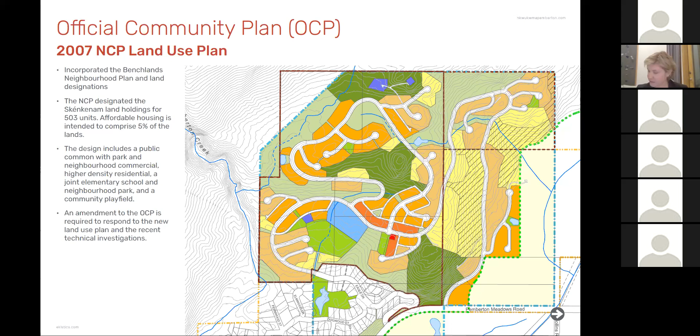And the zoning, likewise, this is the zoning right now. It is R-1. We would, if it was consistent with the neighborhood concept plan, could proceed. But again, we want to make sure that it isn't just a single family subdivision, that it meets the needs of the greater community with a range of housing types and densities.

I think it's also really important to know that if you're looking for community amenities through new development, what triggers that is rezoning. So this also allows the rezoning to be in place so that the developer can contribute to the community amenities.

I would note that the CD zoning that's proposed will have flexible commercial community use spaces, as well as allow some flexibility over time in the land uses. So it's a much better tool than the really restrictive R-1 zoning.

I will now hand off to Paul Fensky of Ekistics, who will present the development plan. Thank you.

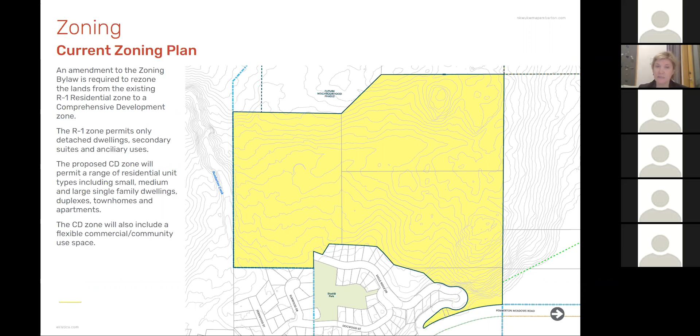Thanks very much, Carolyn, Maxine, Carrie, for the presentation to date. We're very pleased to be here with you tonight. My name is Paul Fensky. I'm a principal with Ekistics, and we led the planning and design with the Village of Pemberton for the NCP back in 2005, 2007. So we're very pleased to be with you this evening, participating in the updating of the plan and the advancing of the Nkwúkwma neighborhood.

The last time we had a chance to be together was at the very beginning of the pandemic, March 11th, 2020. That was the evening we held an open house in the community center, where we presented our understandings of the land, as well as some fly-through videos to help translate that 2D understanding into a 3-dimensional understanding based on the latest 1 meter LiDAR contours and the various constraints we understood at that time.

In the intervening year and a half, there's been a world pandemic, but more specifically in terms of the Nkwúkwma neighborhood, there have been continued technical reviews, both planning and engineering reviews undertaken on site, as well as initial conversations with both the Village of Pemberton and the provincial government.

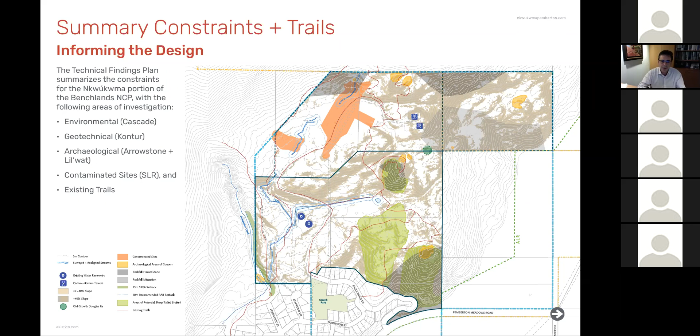The lands rise well above the valley floor and feature a variety of solar orientations and big valley views. In understanding where trails move in relation to the steep slopes, the riparian systems that move through and help drain the site, as well as the areas of contamination, ecological and cultural interest, this plan provides an opportunity for us to have a solid foundation of information as we started to explore how the Nkwúkwma neighborhood could fit within these lands and form a part of the larger, more complete Pemberton community.

Working with all of the opportunities and constraints identified within this 77 acres of the Nkwúkwma neighborhood lands, the lands have been categorized now into their level of constraint. The most constrained lands, coded green, represent steep slopes, areas of riparian and waterways, and areas with high environmental sensitivity, covering approximately 35 acres, or 45%, of the Nkwúkwma neighborhood lands.

Medium constrained lands represent moderate slopes, low as well as medium ESAs. Geotechnical and archaeological areas have been identified, as well as those lands that are difficult for accessing with streets or municipal services, and they cover approximately 10% of the site, or 7.5 acres.

The remaining lands are coded in a light cream color, noted in the legend as potential development areas, and they have low constraints. They're generally gentle to moderate slopes, with no or low ESAs, and include areas like utility corridors. They also provide lands that are contiguous, larger areas where we can have street access and run municipal services. Interestingly, they also represent about 35 acres, or 45%, of the site.

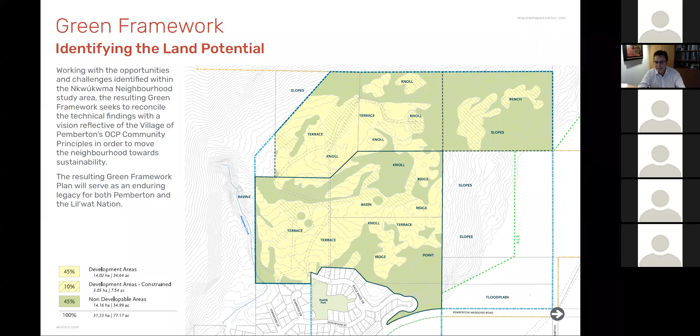As we transition from that 2D plan with all of its somewhat abstract forms and lay that onto the three-dimensional model of the site, we can better understand where those areas of development potential are, as well as where those areas of non-development potential are.

Moving up from Eagle Ridge Drive, that area where the two water reservoirs are located, shown as white dots on the plan, sits in the middle of what is the largest potential development area with the lowest constraints. Likewise, sitting above a band of green forest represented by the steep slopes is where the historic gun range and rifle club was, noted as a terrace, again with gentle lands that sit way up top.

In contrast, we can see the green lands, especially the point that rises above Pemberton Meadows Road at the entrance to Eagle Ridge Drive, is part of that incredibly steep slope area, with not only archaeological interests and habitat values, but also geotechnical constraints. The green framework then begins to direct the planning, as mentioned, and starts conserving what matters in the Nkwúkwma neighborhood.

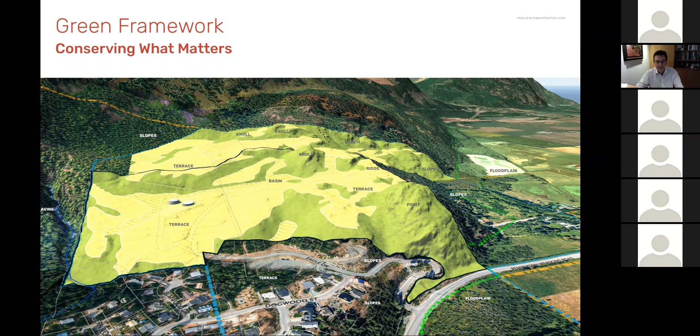As we turn our attention from the larger Benchlands OCP lands and their constraints, and begin to focus down on the Nkwúkwma development application that was submitted and is currently with the Village of Pemberton, we wanted to make sure that we were satisfying all of the requirements as listed by the village.

That involved having Cascade Environmental Resource Group do the initial environmental review and riparian assessment, and that work served to confirm our understanding of the site and also confirmed the suitability of the neighborhood plan.

Before work goes ahead on the site, there are still some required surveys that will be done, including rare and endangered plants, and wildlife, to confirm the presence, such as the little brown myotis roosting sites, a type of local brown bat, as well as the potential for sharp-tailed snake, specifically denning sites. There'll be a screech owl nest survey done, as well as songbird nesting windows, which will limit the time of potential clearing of the land at the time of development permitting.

There'll be a series of vegetation requirements that Cascade identified, really stressing the retention of vegetation currently on the site to facilitate wildlife movement, retain existing breeding and foraging areas, and specifically look for opportunities to avoid impacts on the local bear population. New landscaping, whether street trees or private yards, will require native tree and shrub species that don't attract bears but promote pollinators, birds, bees, and butterflies as part of a larger habitat enhancement strategy.

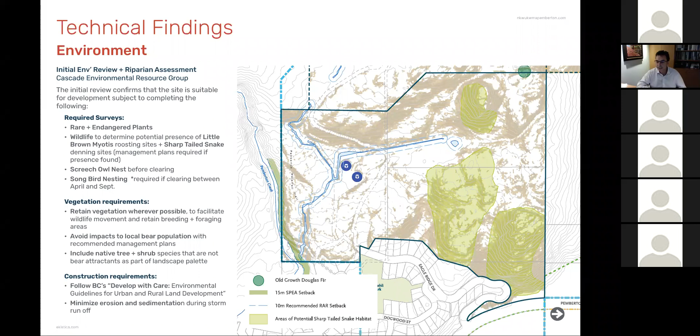In addition to the environmental work done by Cascade, Kontur geotechnical consultants also provided a geotechnical assessment that characterized those observed naturally occurring areas of hazard, noted on the plan in the darkest gray areas, and areas that we needed to stay away from in terms of guiding future development and potential neighborhood uses, as well as identifying areas where mitigation could occur to lessen those hazards.

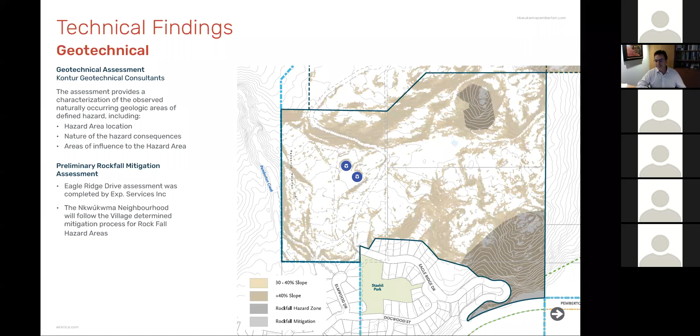With that series of technical studies done, not only for the Benchlands but also more specifically for the Nkwúkwma neighborhood, that 77 acres of the lower portion of the Benchlands sitting adjacent and slightly above phase 1 of the Benchlands, as an extension of Eagle Ridge Drive, we then come to the neighborhood concept.

This is a draft concept, but it's a concept that we've been able to engage those constraints, as noted, as well as engage that community feedback that Carolyn was able to walk us through the highlights of, and in doing so, come up with an approach very much centered in supporting the community.

Specifically, looking at opportunities to work with the land, and in working with the land, ensure that we're minimizing intrusion and land regrading, that we apply hillside design strategies where we're stepping building foundations with walkout basements, minimizing retaining walls, and applying hillside street standards, which allow us to have a narrower platform while still providing for the safe movement of people, bicycles, and cars in a shared platform.

We're also celebrating the views, and that also means ensuring the privacy of our neighbors, those who live within Benchlands phase 1. The plan also is centered on delivering a diversity of homes, and that's part of the need for the OCP update and the rezoning, to ensure that we can do more than simply large RS1 single-family homes.

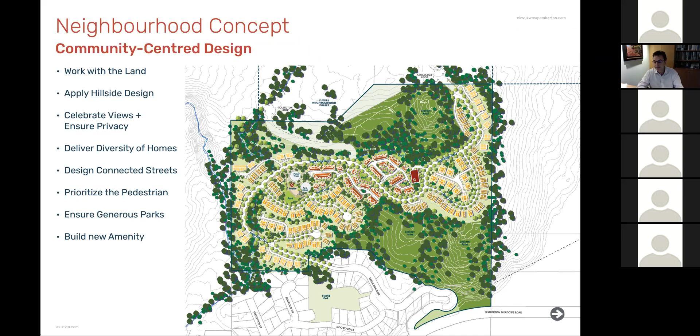As we zoom in to that area, the 77 acres subject of the Nkwúkwma neighborhood development application, we see the extension of Eagle Ridge Drive as it circulates first to the south and then to the west as it climbs up the hill, moving in behind the current water reservoirs.

It arrives at a central terraced platform before then moving further up and around the central rocky knoll towards phase 3, or those future development lands currently under remediation for their contamination.

Within this plan, you see different colors of buildings, which represent different sizes of both single family detached, as well as duplex, townhomes, and a single apartment building located in the center of the plan.

The plan is structured to provide a pedestrian orientation with sidewalks on local streets, as well as the extension of Eagle Ridge Drive, and the provision of both public neighborhood parks, as noted with the label park, both a lower park and an upper park, with opportunities for grass gathering areas, whether for toboggan hills and parties, but also playgrounds, covered pavilions, and even adventure play from pump tracks to rock climbing opportunities.

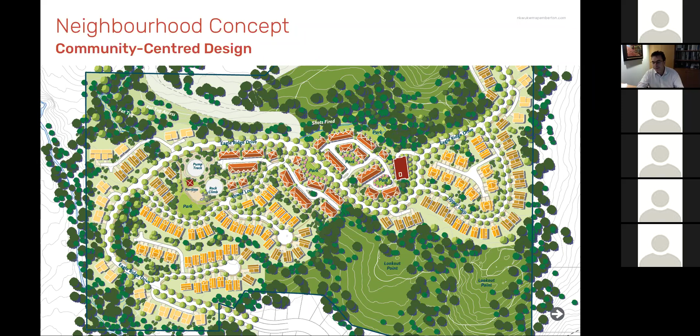As mentioned already, the idea of the housing mix presented is to recognize the community need for both attainable, family-friendly housing, as well as downsizing and aging-in-place opportunities. In total, the plan provides 85% of all future homes as ground-oriented homes, either as townhomes, duplexes, and small single family, as well as some medium and large homes, with a total of 267 homes within this portion of the Nkwúkwma neighborhood. The character of the homes designed and being pursued is one that celebrates Pemberton's character as a mountain community.

As well as one of small town charm in terms of its materials, which will be regulated through site-specific design guidelines registered on the property itself. Part of the need for rezoning is the shifting down of the size of homes and associated lots. We realize that to have a community neighborhood with all these features and amenities, we can live in a way that allows not only large homes but also small single family, duplex, townhome, and even apartment, all within the same neighborhood—really an opportunity to provide a home for everyone.

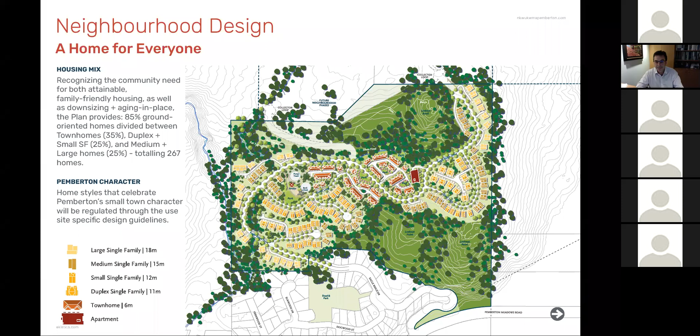In addition to homes and new amenities, there's an opportunity to design the street network as a place of public realm that's really intended to be a shared space. You can see the different colors of roads, with the extension of Eagle Ridge Drive in the darkest orange as a designated collector loop, moving up and around through the different terraces of the Nkwúkwma neighborhood. Eventually, as noted in the dashed arrows, it will form a collecting loop that feeds back on itself and down the hill.

In addition to the collecting loop in the darkest orange, we have the lighter orange of local streets, with both a lower loop around the neighborhood park, as well as an upper loop with dramatic views over the valley. In addition to those two public standards of roads, there are also opportunities for strata drives, noted in yellow, as well as shared driveways, noted in blue.

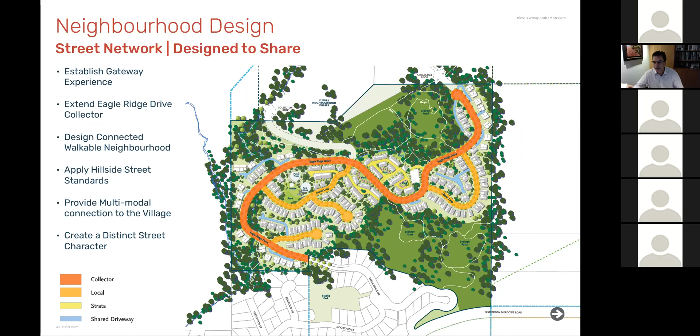As we go to the next slide.

Given our experience working in mountain communities from Whistler to the Okanagan, we have experience designing new road cross sections for these new neighborhoods. This is what we're proposing within the Nkwúkwma neighborhood: a new street network that's really intended to be shared by all. In doing so, there's an opportunity with the extension of Eagle Ridge Drive to establish a gateway experience as we continue to circulate up into the Benchlands and design a connected neighborhood.

Of course, providing two travel lanes as noted, opportunities for parking, as well as opportunities for a separated shared pedestrian and cycling pathway, complete with street trees and lighting standards that focus the light down in order to preserve the rural night sky.

This multimodal connection, or shared pathway for pedestrians and cyclists, will connect the Nkwúkwma neighborhood all the way down into the village itself, creating a very distinct street character and neighborhood experience.

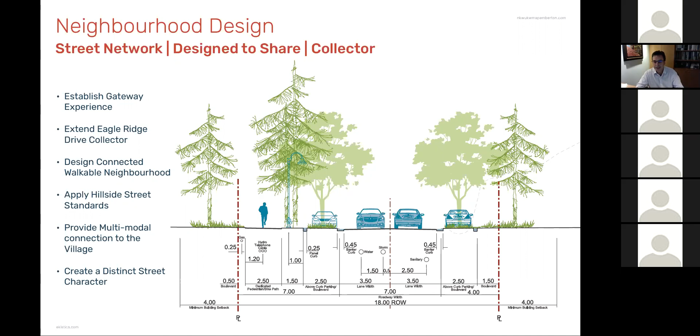Next slide. That approach to a hillside design standard that limits and restricts the environmental and physical impact of new roads in a community has also been extended to the way we design the local street that accesses individual homes, whether single family, townhomes, or the apartment building. In doing so, we see opportunities still for two lanes of traffic, parking on one side, and still incorporating opportunities for pedestrian walkway, as well as planted boulevards with street trees and downcast lighting.

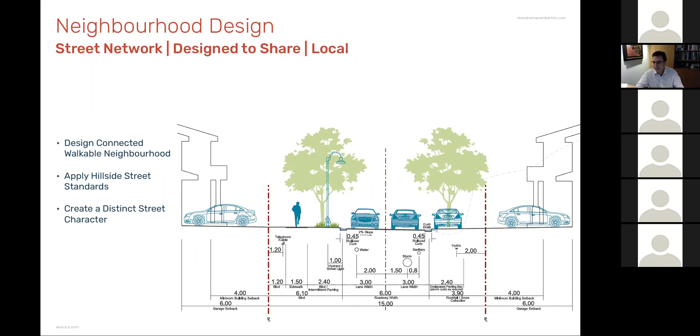Moving on to parks and trails, really the cornerstone opportunity presented by the land itself. We wanted to make sure the land had a sense of generous parks, and in fact almost 50% of the Nkwúkwma neighborhood lands are dedicated as public park and natural area, ensuring there's lots of room to roam, as it were.

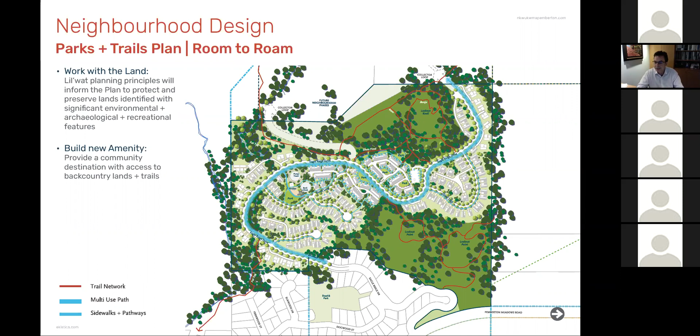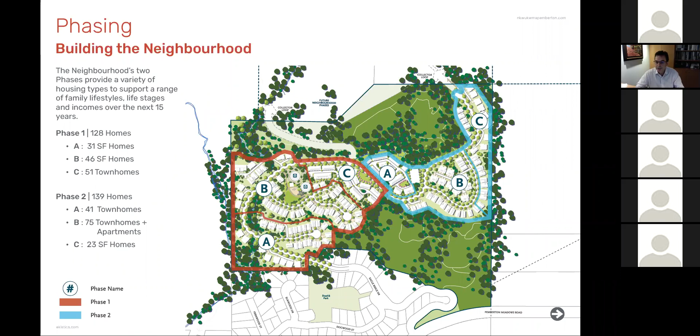The phasing of the Nkwúkwma neighborhood is really divided between two basic phases over the next 10 to 15-year build out. Phase 1 of 128 homes features a series of ground-oriented homes distributed across phases A, B, and C. Phase 2, outlined in light blue, features the townhomes and apartments, as well as a few ridge top single families in section C.

In support of the Nkwúkwma development application are a series of reports on civil engineering as well as transportation. The civil engineering report was undertaken by InterCAD civil engineers, who also worked with us back in 2007 on the original NCP plan, so they're well familiar with the village of Pemberton as well as the site's current constraints. The current 2021 report considers the development application for the 267 homes across those two phases, and it outlines the servicing requirements for the streets, water distribution, sanitary sewers, as well as stormwater drainage.

The proposed streets use hillside street standards that provide an opportunity to lower the design speed with a narrower platform that has less impact on the environment, while ensuring that the maximum public road grade is 12% or less. As part of the extension of Eagle Ridge Drive, there'll ultimately be a collector loop through the upper lands linking back onto itself to provide multiple ways in and out of the full build out of the benchlands.